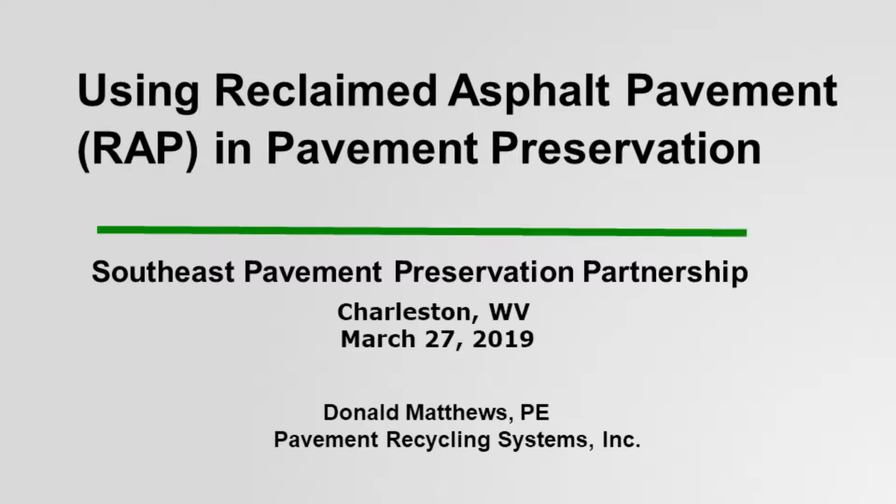So I'm going to talk about using RAP, reclaimed asphalt pavement, in pavement preservation. Let's talk about what we know. One is asphalt is the second most recycled material in the world, only behind water. And it's a valuable aggregate. Some of the best aggregates we have are in the roadways, and it works really well in hot mix, but some areas limit the amount that can be used in hot mix, and sometimes it's not cost effective. If some agencies allow it and others don't, the hot mix producer isn't going to look at it as a consistent method.

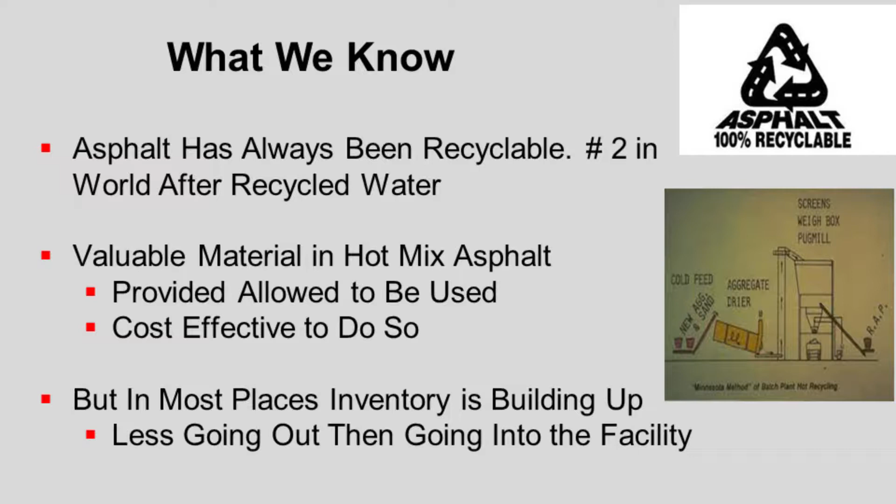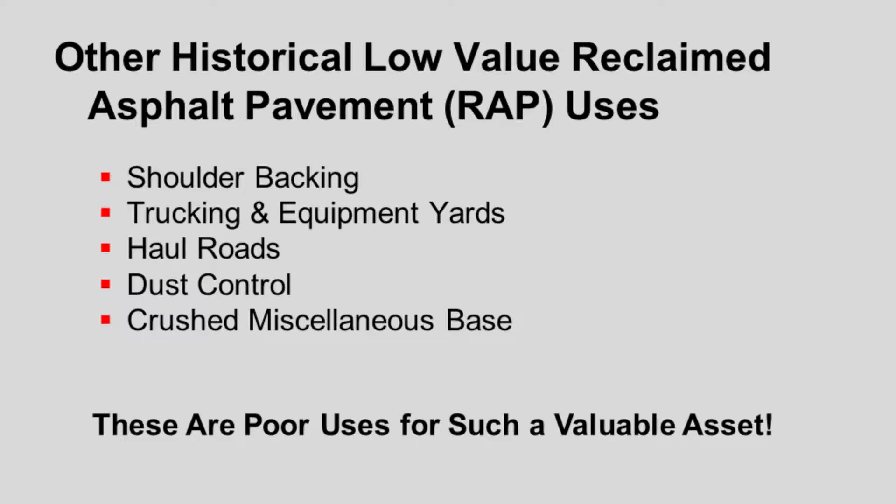Because of that limitation, we keep having buildups in different areas around the country. We're getting mounds and mountains of RAP. Some of the historical uses have been shoulder backing, laying it down in yards, haul roads, dust control, and other miscellaneous uses. But these are really a poor value for such a valuable asset. There's no need to squander it or virgin aggregate, because in many cases RAP outperforms the virgin materials.

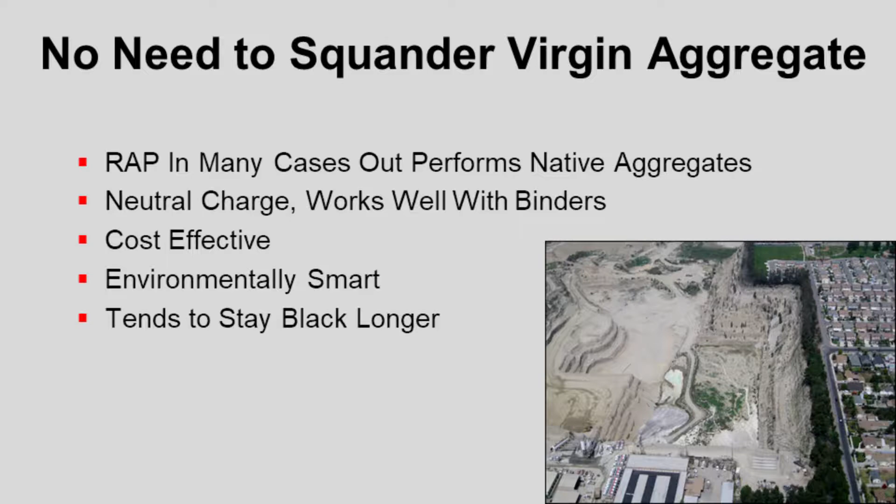It's neutrally charged, so when we use it with emulsions, we don't have a problem whether it'll work. It's really cost effective. It's environmentally smarter. And when we use it in seals, it tends to stay black a little bit longer. I'm not going to say it's a black rock because it does oxidize out, but it tends to stay black longer. So today what I want to talk about is some alternative uses.

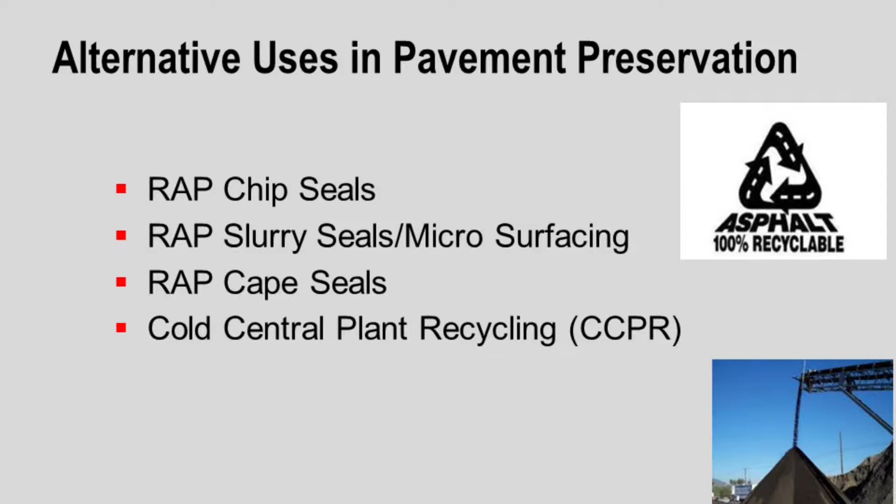One is RAP chip seals, some RAP and slurry microsurfacing, combining the two into cape seals, and then I'm going to touch a little bit more on what Jason started here about cold central plant recycling.

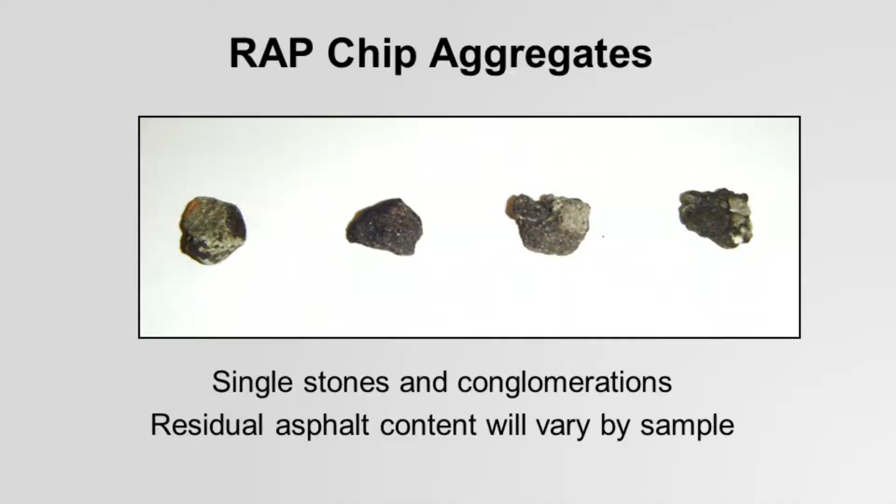So when we're looking at RAP as a chip aggregate, you'll find when you crush it down that you have different components of it. Some is almost the original virgin rock, all the way to the end where it's just a conglomeration of different aggregate sizes. And it'll vary depending on the type of source of the RAP.

So what we do is look at our RAP gradations. These are the two gradations we make out of California, and we use it quite a bit. I will tell you right now that when we have an agency switch over to RAP aggregate, RAP slurry seals, or RAP microsurfacing, they don't want to switch back. They like it better, they like the looks better, they like the performance better. The only time an agency will ever switch back is simply from a cost standpoint if they have a job that's way out, closer to a virgin aggregate source. But if they can get the RAP, they actually specify it and do it.

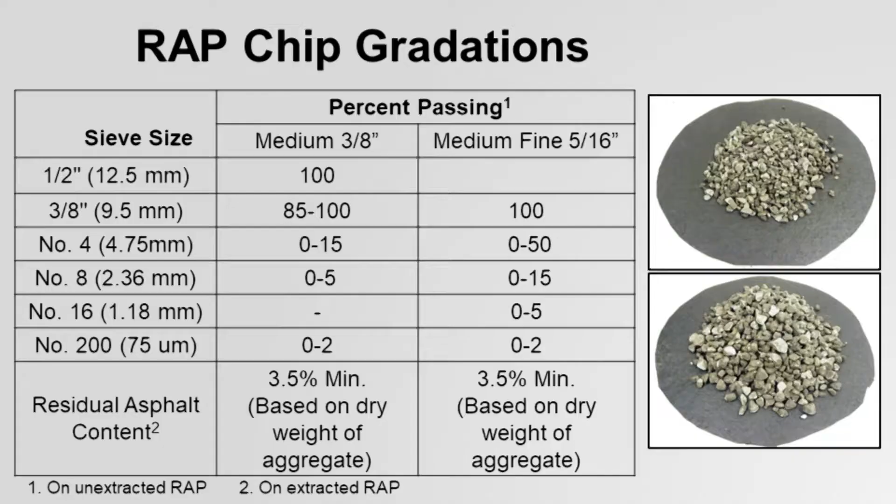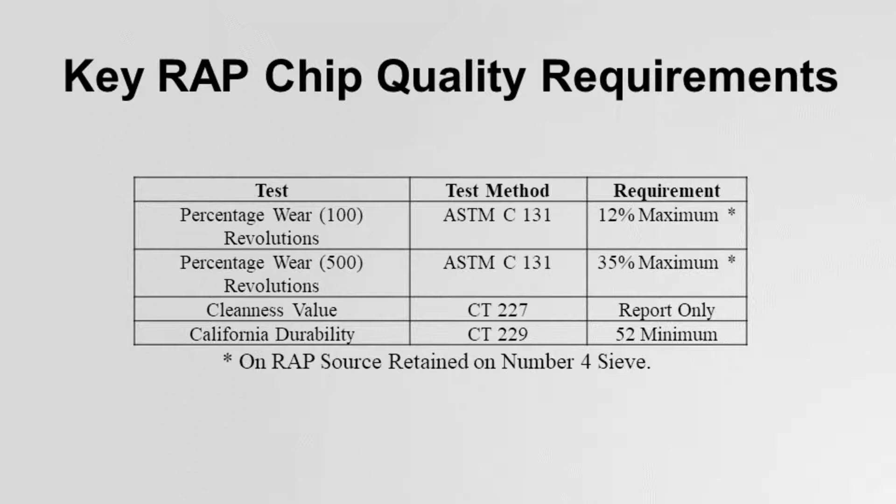We also look at cleanness value, but we only report it. The difference versus RAP is when you are doing virgin aggregate, you want to make sure it's really clean so that the rock can bind to the asphalt. Well, the dust in RAP chip is actually asphalt, so we get extremely good binding to the asphalt.

Sometimes people go, oh wow, this looks dusty, but the dust is actually asphalt. We don't care. What we do want to care about is if we're using an emulsion based product, we'll wet it down so it'll stick to the emulsion a little bit better. If we're using an asphalt rubber though, it's just the opposite. We want to dry it out so it sticks to the asphalt rubber better. But again, the bonding is excellent.

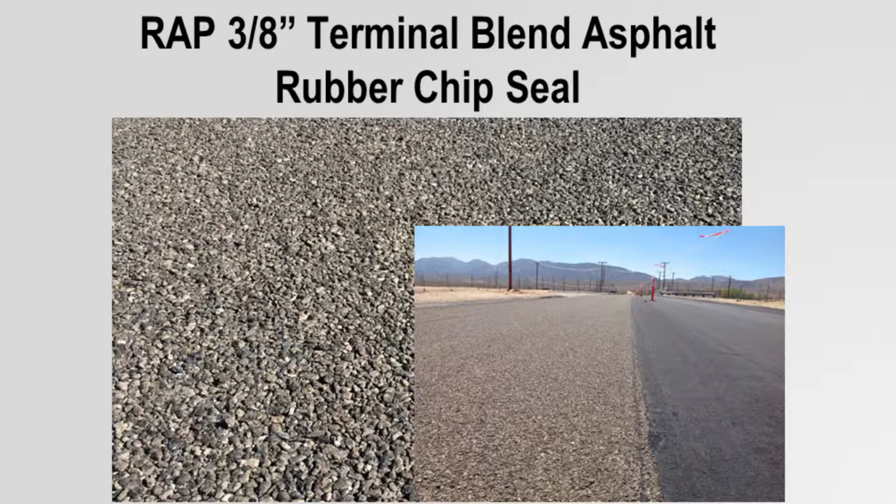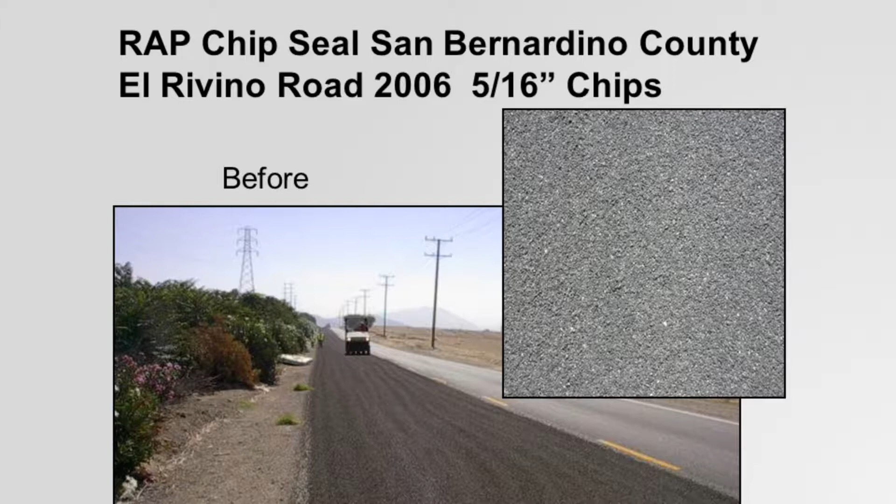So here's just an example. Here was a 3/8 inch chip using an asphalt rubber chip seal. Here we're just applying it with a polymer modified chip seal, 5/16. First job we did, and anybody who flew out way back when, we actually traveled on this road when we had the recycling conference in California back in, I think it was 2009. We had done a chip seal for San Bernardino County. They tried it, it was their first job, and we did it with 5/16 inch chip.

You look at this road today, 12 years later, and it's still handling a lot of traffic. There's a cement plant, and it looks really good. People ask me why we only did one side of the road - well, that was San Bernardino County on the right side. On the left side was Riverside County, so they didn't do that other side.

So we can do it with a scrub seal, which is essentially where we take the emulsion and use brooms to scrub it into the cracks, so it acts as a crack filler and a chip seal at the same time. We use an emulsion with RAP chip.

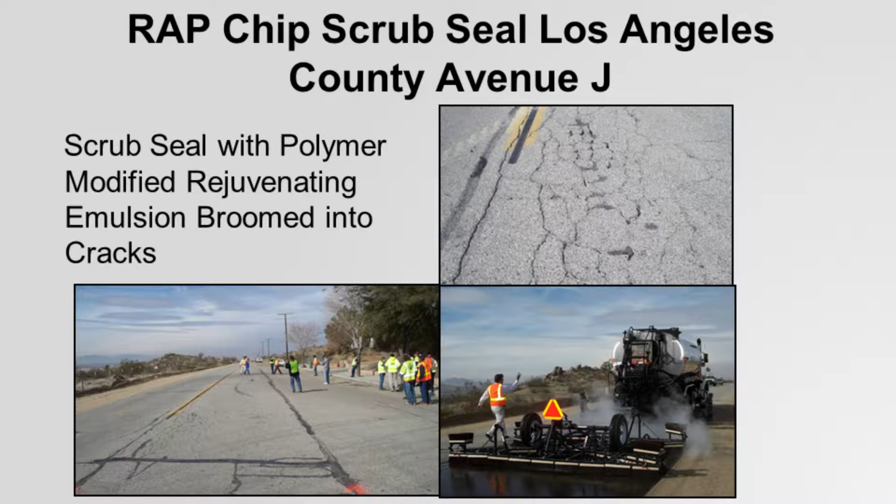County of Los Angeles has gone 100% exclusively to RAP chip and RAP microsurfacing. They do some projects where I wouldn't necessarily recommend a chip seal - there's a lot of fatigue cracking, and they're essentially just trying to buy time with it, so they do a scrub seal. You can come in and actually see some of the cracks, but the chip seal with the RAP stays in the cracks, and 6 years later they're still happy with the performance. It may not look as good, but it's definitely sealing it up and buying them time.

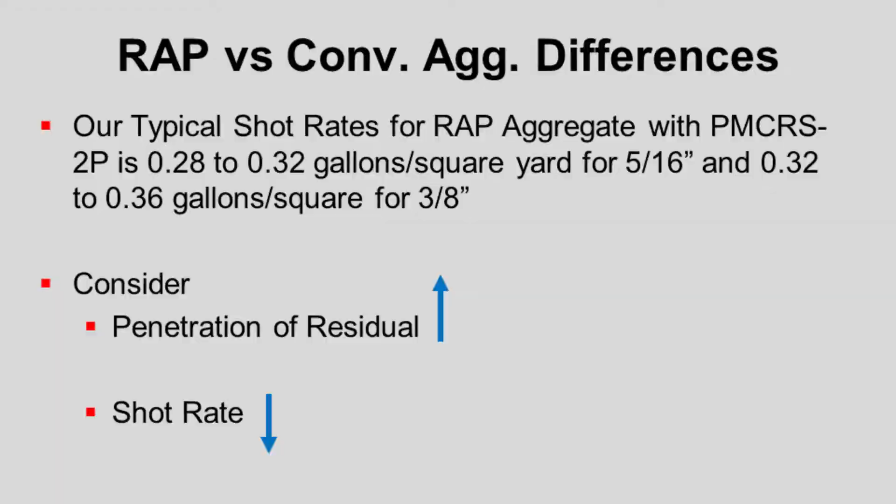What's the difference between RAP and conventional aggregate? Well, our typical shot rates for RAP aggregates are about 0.28 to 0.32 gallons per square yard for a 5/16 mix, and about 0.32 to 0.36 gallons for a 3/8 mix.

We start off with the same shot rate for the RAP - we don't get any benefit from the asphalt. But the one thing we do look at is the penetration on the residual asphalt. If the penetration is high, we reduce our shot rate down because we get a little more diffusion, a little softening of that asphalt, and that RAP blends in a bit more with the emulsion we put down on the roadway.

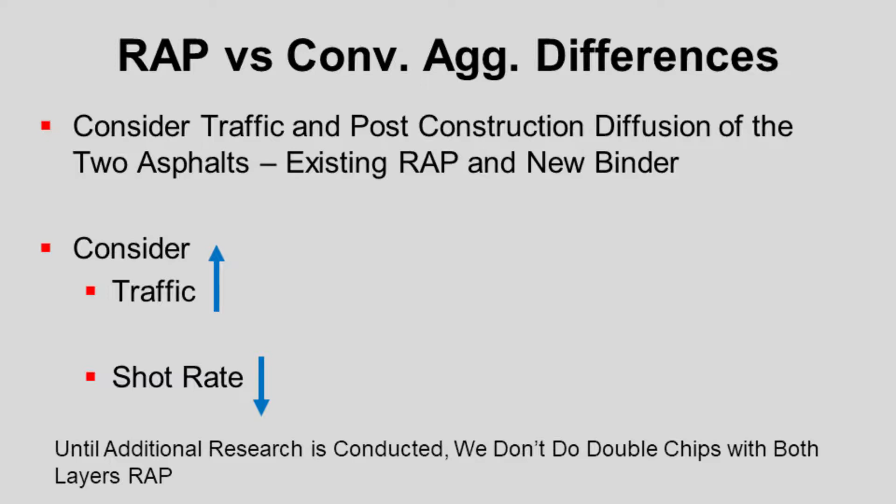On the other hand, we also look at traffic. With high traffic, mostly we're worried about dislodging the aggregate on chip seals. It's just the opposite with RAP - if traffic is high, we actually reduce the shot rate. It needs the asphalt in the emulsion, and it softens it up faster. On one job where we did the same shot rate, we got a bit of bleeding. We reduced the shot rate and the traffic actually kneaded it in, so we could reduce the emulsion, actually saving some money.

Right now, until we do additional research, we're not going to look at doing a double chip with RAP. So if it's a double chip, we typically do one or the other layers, depending on the agency's preference - one with conventional aggregate, one with RAP. We just don't want so much oil and so much asphalt in that existing roadway.

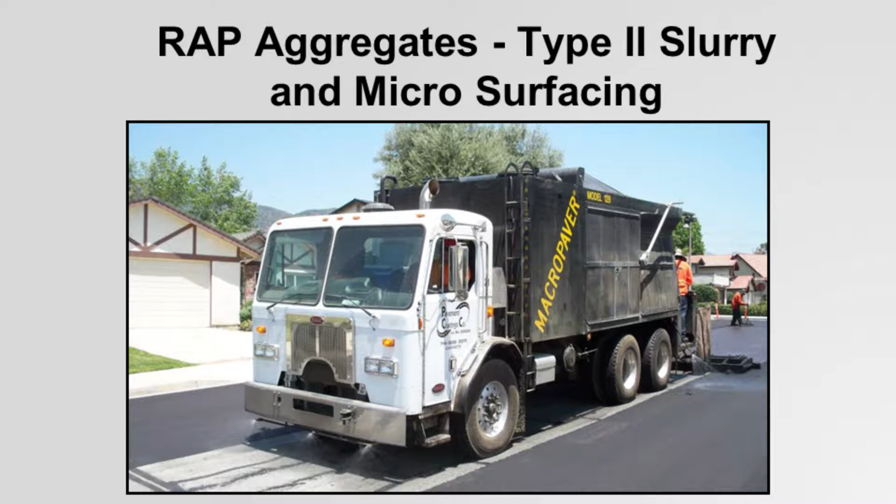We have no problem doing a RAP cape seal with a RAP chip seal and a RAP microsurfacing on top of it. So when it comes to RAP aggregates, type 2 slurries or microsurfacing, we use conventional equipment.

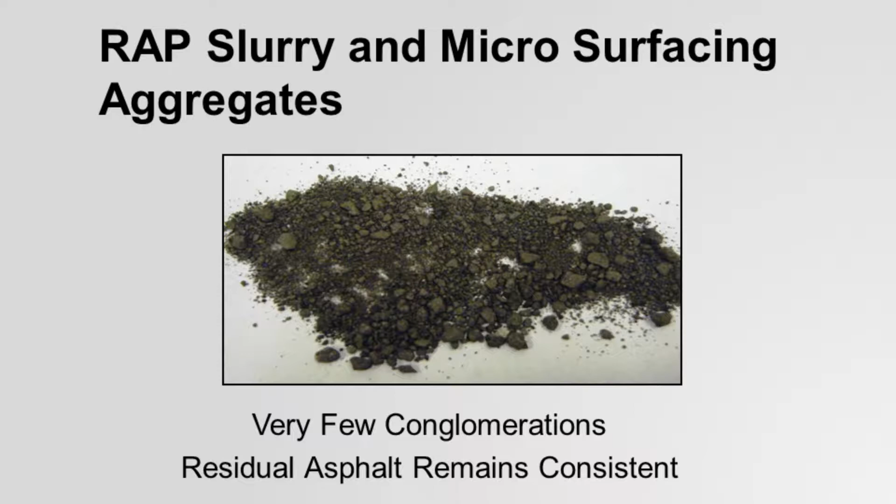And now, because we're getting finer material, we have fewer conglomerations - it's closer to the parent aggregate. There is some, I won't say there isn't, and I'm going to show you some gradations on that. This is a typical type 2 RAP aggregate pile that we just placed on the job.

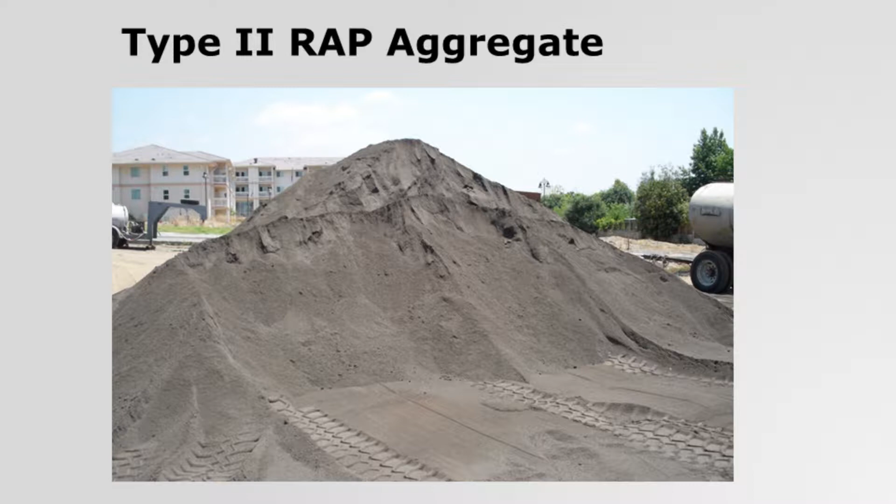So the differences for RAP aggregate in slurry or microsurfacing - we don't get as many fines. The fines are locked up in the asphalt, so it's a bit coarser on the RAP gradation than on a typical slurry. We don't need those fines to help with the bonding; it's already within the aggregate itself.

We do have an issue with clumping. So when we make the material, we don't stockpile it as long because the RAP will start sticking together. If we make a whole batch of RAP slurry, like I have right now, I'll just run it over a screen right before we send it out. It breaks down pretty easily, but we want to make sure it doesn't clump out in the field.

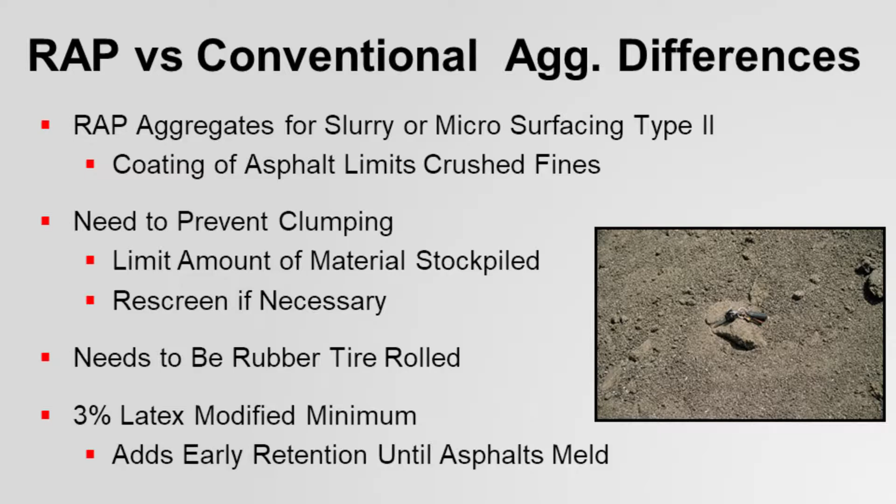We do use a rubber tire roller on every slurry - it helps start kneading the RAP and the emulsion together. We also add 3% latex modified - we modify the emulsion with 3% latex. The polymer actually helps bind everything together until everything starts melting together.

If you look at our typical type 2 gradation, you're going to see that the unextracted RAP, we're down to about 2 to 12% passing the number 200, which is a little off from the ISSA type 2 slurry specification. But when we extract it, we're really close to being into the ISSA slurry requirements.

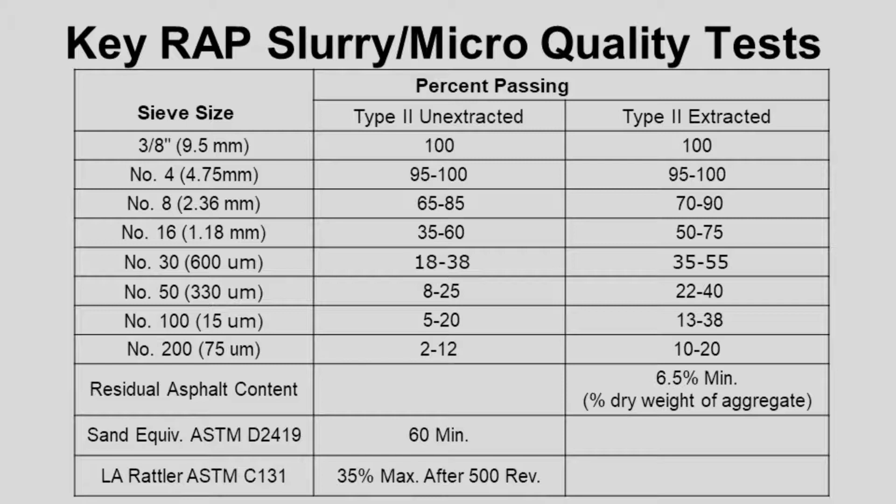We do require that at least 6.5% residual asphalt is in the RAP. We do that to make sure that it is pure RAP, that we have a lot of the binder in there. We don't want some dirty material in there. We require a sand equivalent, and we do an LA Rattler on all of our RAP to make sure we have a good durable material.

The one thing I want you to note here is we said we use a rubber tire and we add 3% latex, and everybody goes, oh well, that'll increase the cost. Well, no, because of the RAP, when you're looking at that in slurry, you don't need part of your emulsion to just go to coating the material. It's already coated, so it goes to more bonding. And because of that, you can see with RAP, our emulsion contents are typically 10 to 14%.

Compared to our conventional aggregate that's 12 to 18%. So we actually use less emulsion, and therefore the cost with RAP is actually slightly lower than it is with conventional aggregate. And you get the rubber tire roller, and you get the additional latex.

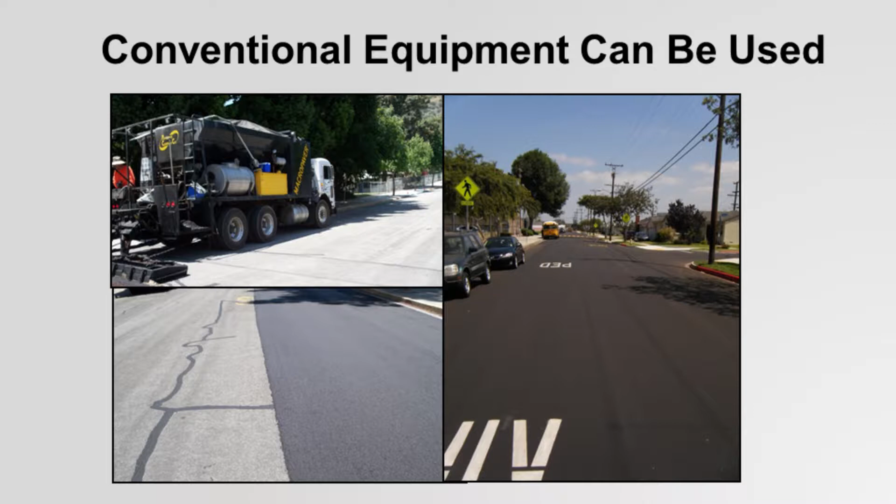We do look at a residual AC that we want a high residual asphalt content. Any conventional equipment can be used. It's not like you need special equipment. We do modify essentially the vibrator plates, we move them up a little bit to give a little more room. But we use our typical slurry or microsurfacing equipment.

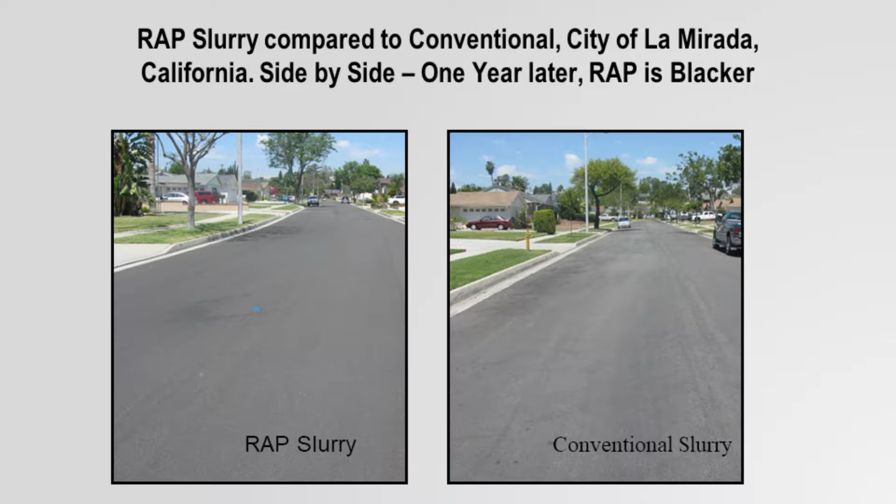And this is what kind of the agencies like, is when you compare a year later or 5 years later and you go down and you look at the streets that were done with conventional aggregate versus RAP aggregate, you just go, you know what, the RAP just kind of looks better. It's not like it's a whole lot darker, but it's a little bit darker. The cracks seem to be filled in a little bit better, and that's why they like it. Plus, it's just environmentally so much more sustainable.

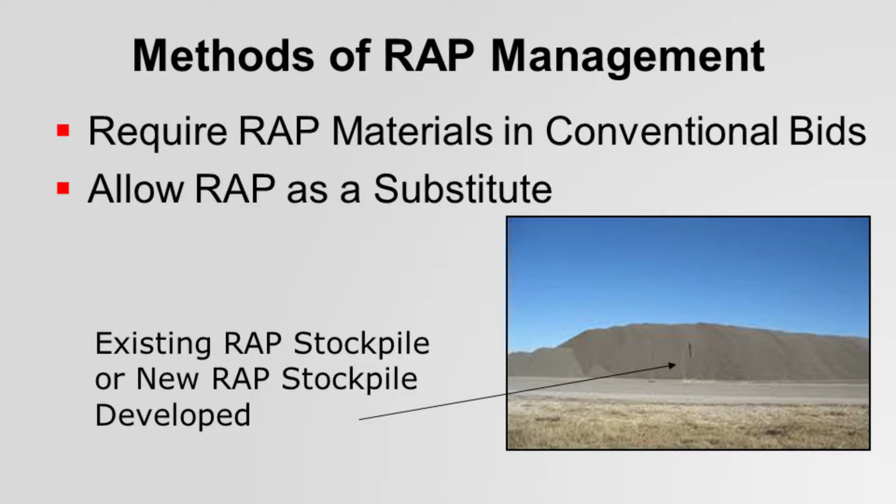So how do you use RAP? Well, one is you can just require it. We have some agencies that say you can't use conventional aggregate, you must use RAP aggregate, period. They specify it. Others just say you can use it as a substitute. You can either use the RAP gradations, or you can use it as the conventional.

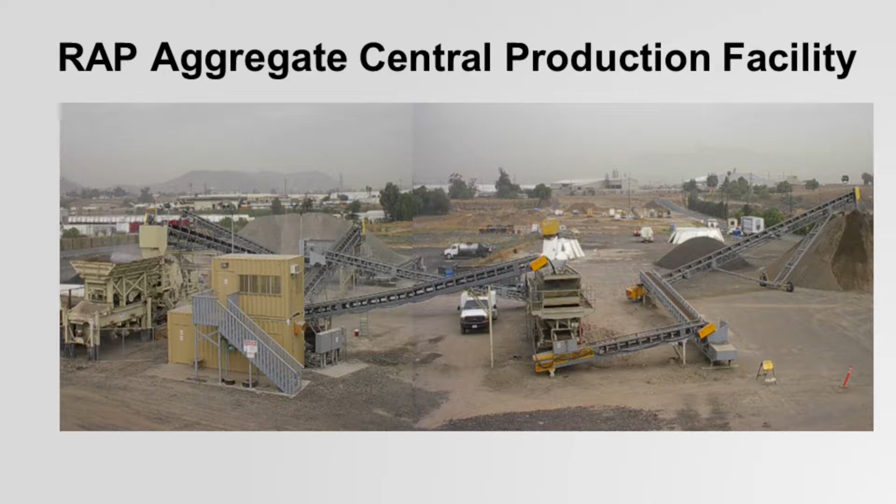It's up to you. We do it several different ways. We have a RAP aggregate central production facility where we go ahead and bring in RAP from all our milling jobs, process it out, make it to sell just to competitors, to whoever wants to buy it. You can see that we just store our 5/16 inch chip made from the RAPs. Every day you could come in and get some of those.

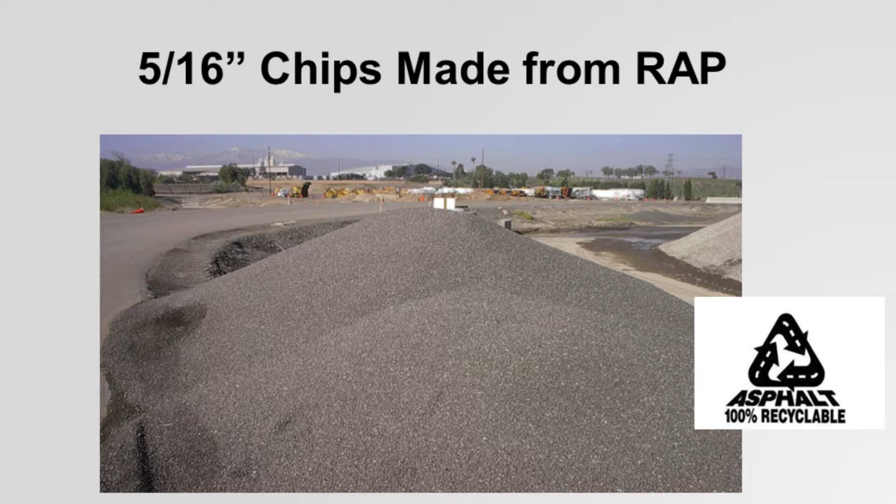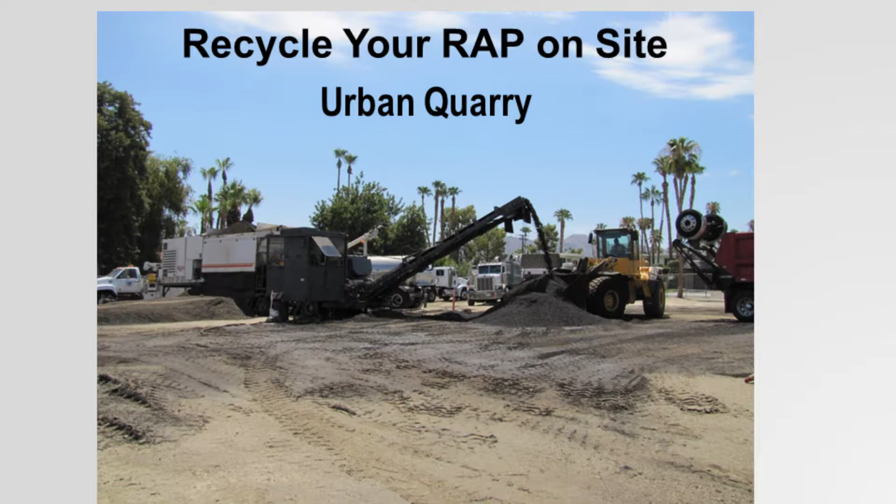Or what we also like to do is we do what we call our urban quarries. And essentially we find RAP piles and we go to them, or we have sites that we bring the material in and we process it and make it on site.

California DOT, Caltrans on one job said, hey, we got a bunch of RAP, we want you to come out and we want to crush it down and use it. And so we ended up making both the chip and slurry simultaneously, came out with a plant, made both of it, and they did a Cape Seal over Interstate 10, which is a huge traffic volume.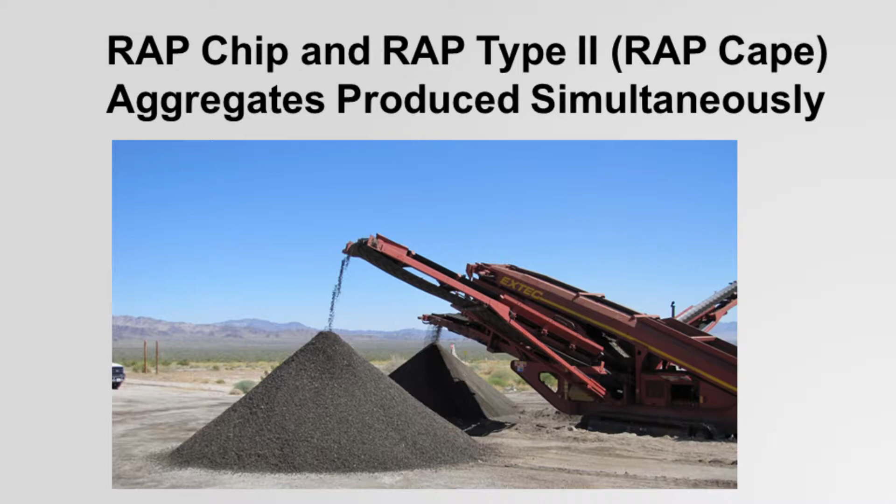I'm going to show you an example of LA County. It's a short video that they did, so how they did it for essentially a Cape Seal where they used RAP chip and RAP slurry.

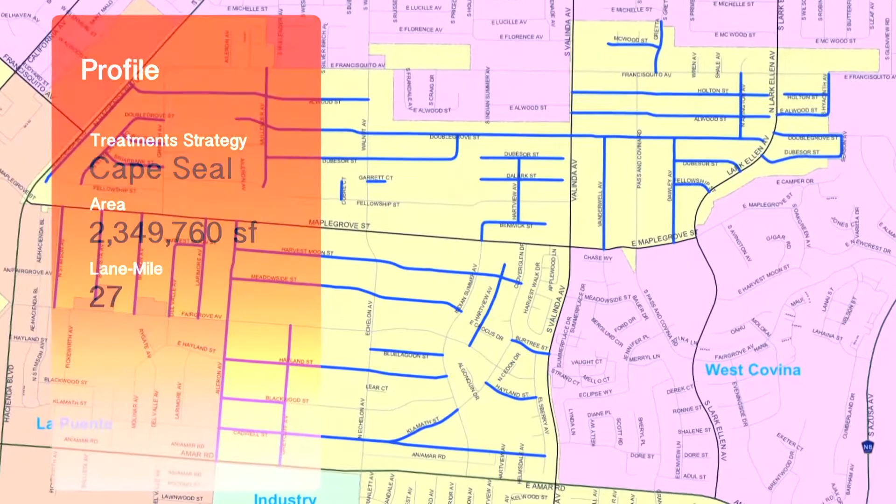Yeah, so they had one project here. And you can see the kind of urban sprawl we have. It was about a 2 million square foot job, and they wanted to do a Cape Seal with the RAP chip and RAP slurry, and they had some areas that were really bad. So what they did is said, hey listen, we're not going to go over there.

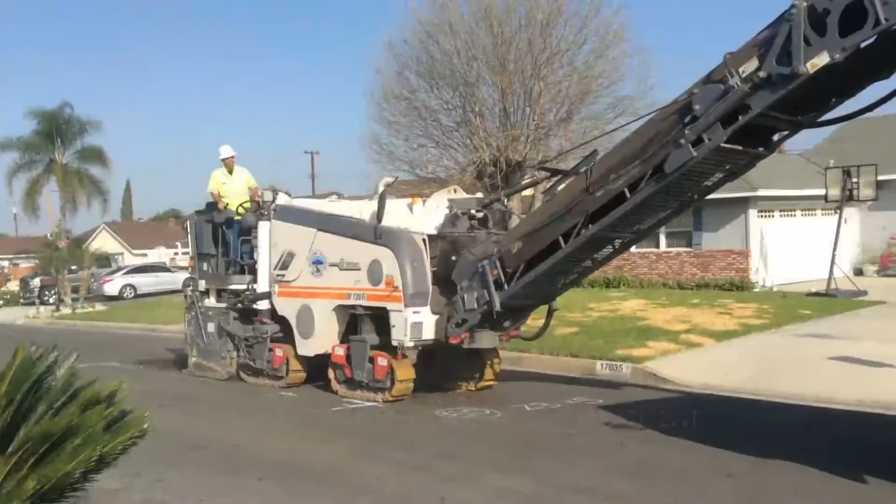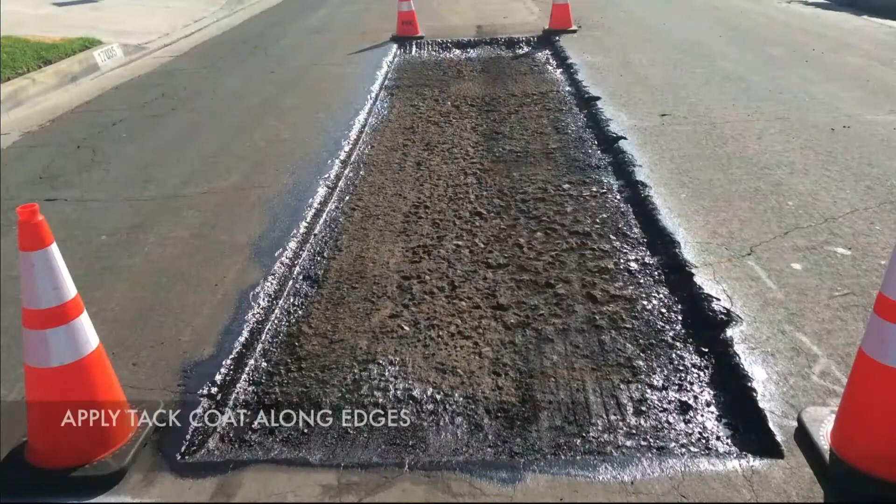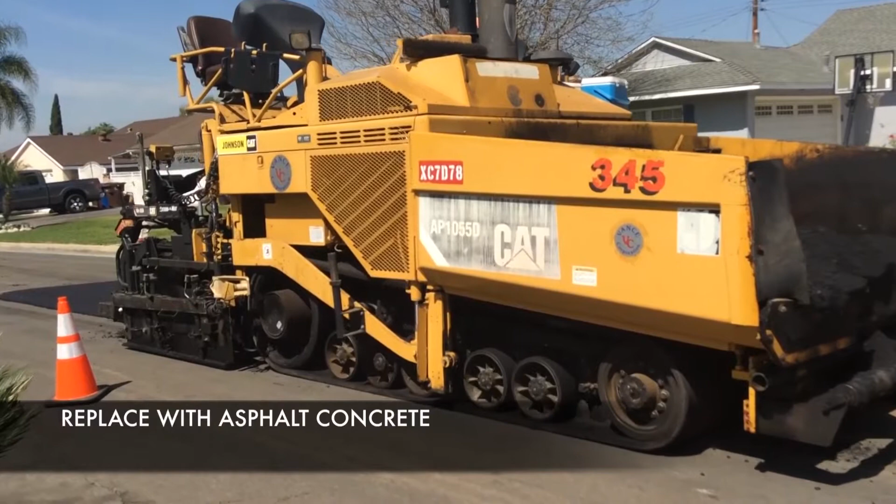We did just a few dig outs first. We milled it out. And then just replaced it with asphalt concrete. So just the real bad subgrade areas, we did isolated dig outs. There were probably about 15 of them throughout the whole project.

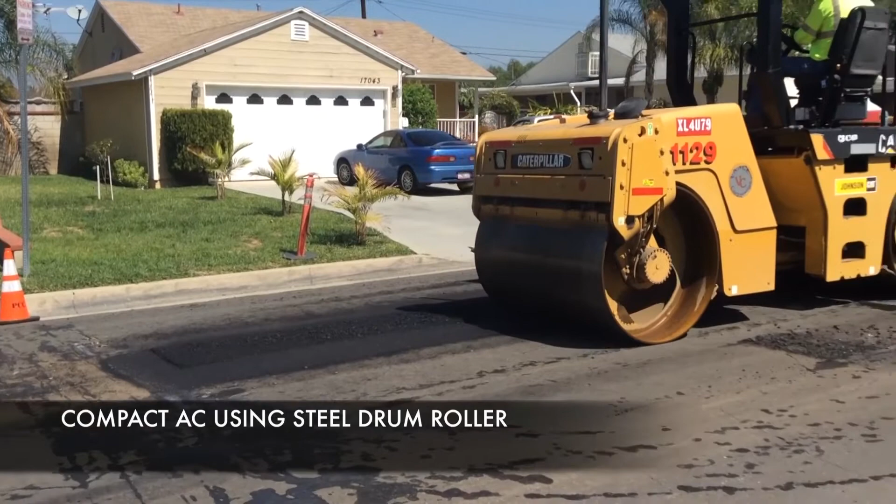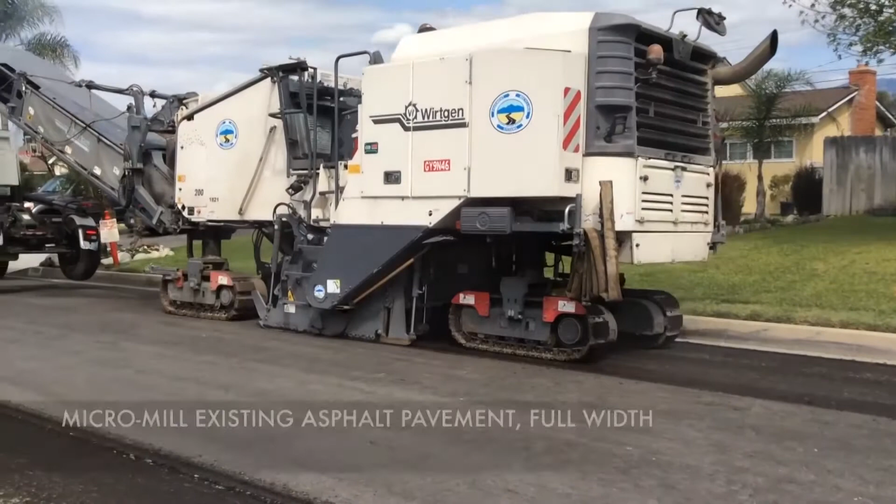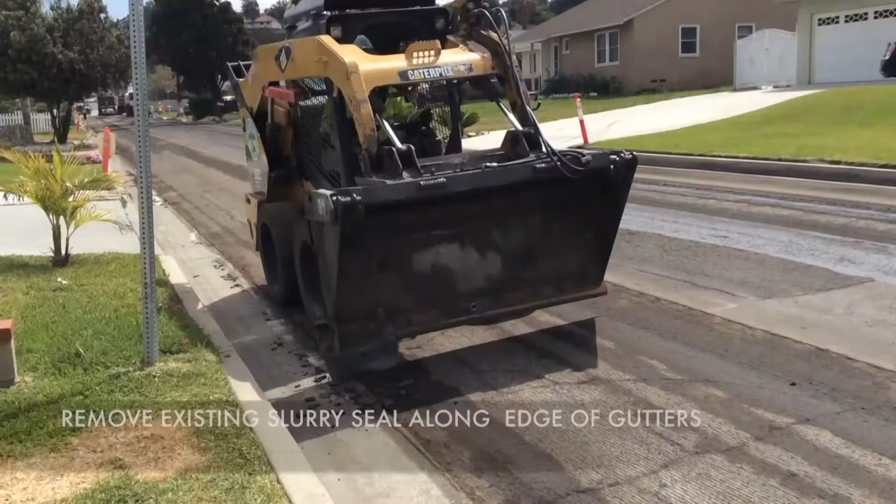LA County has gotten to the point where before they do any slurry or chip, they micromill the road. They just absolutely love it. They think they get better bonding, they can re-get the surface back to where they want, and they remove any other layers. They think it's just a cheap investment to go ahead and micromill the roadway prior to doing their chip.

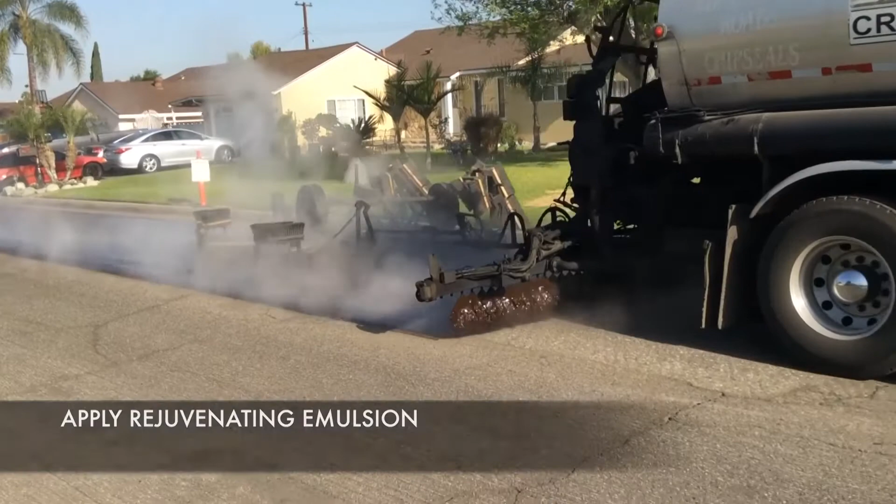So you can see where they micromilled over the patch and some of the cracked areas. And then we do a scrub seal, where we're scrubbing the emulsion in so it acts as a crack filler at the same time. You can see the RAP chip - it looks a lot darker when we're placing the RAP chips.

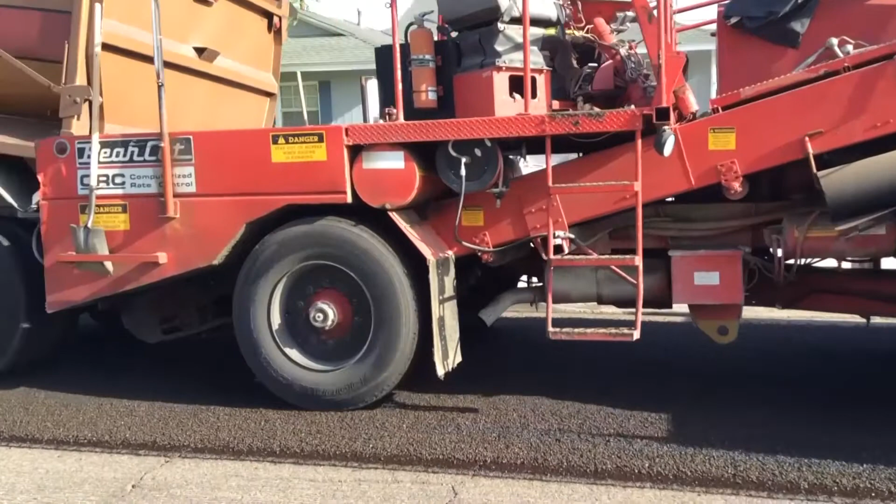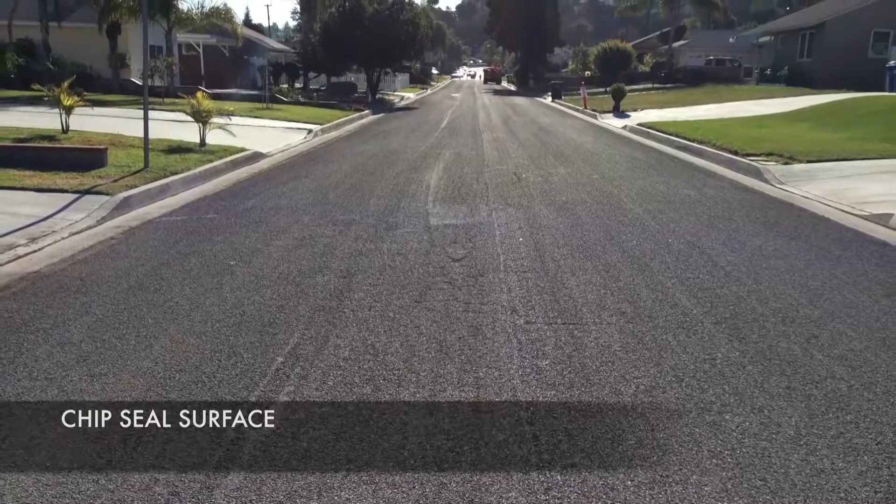Now, we'd never do a chip seal in an urban environment like this, so they'll come back through after that and do a RAP slurry seal on top of it. And that's your kind of finished surface.

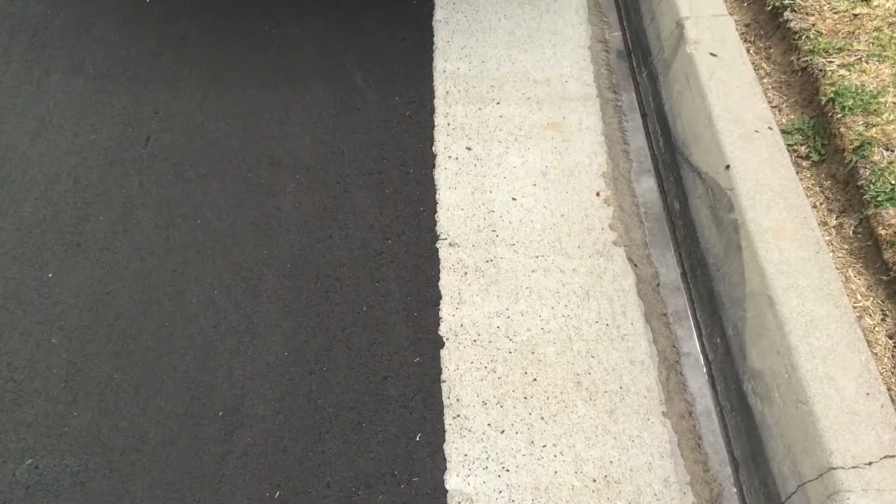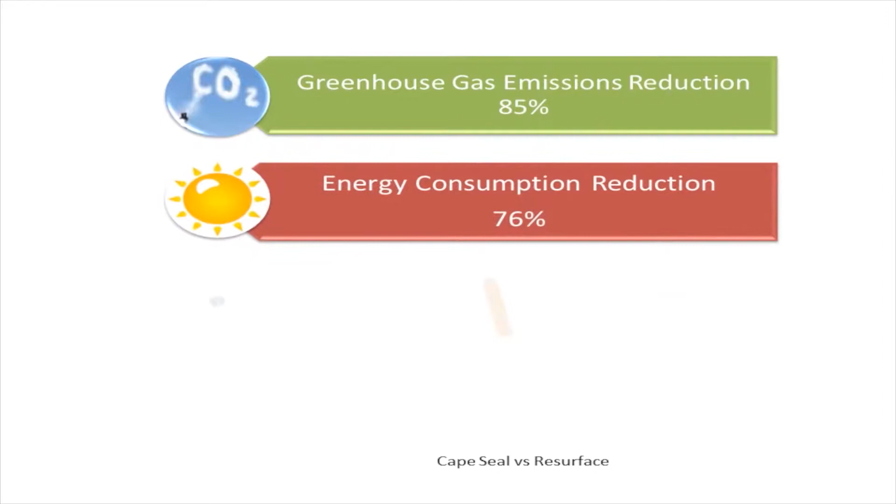And this is what they really started looking at - they calculated how much greenhouse gas emissions they save, their energy consumption, compared to just a normal resurface. And they figured out they had a huge cost savings on it. And this is about 3 years later, just driving the roadways.

So we do a lot of RAP chips, a lot of RAP slurry seals. I know it's starting to get more prevalent throughout the country. I get a lot of phone calls, people asking how to do it. I got one agency from South Dakota who said hey, they were going to do it. They called me back and said it worked real well. As I said, anytime we have an agency use RAP chip or RAP slurry, they don't ever want to go back. They just like the performance better.

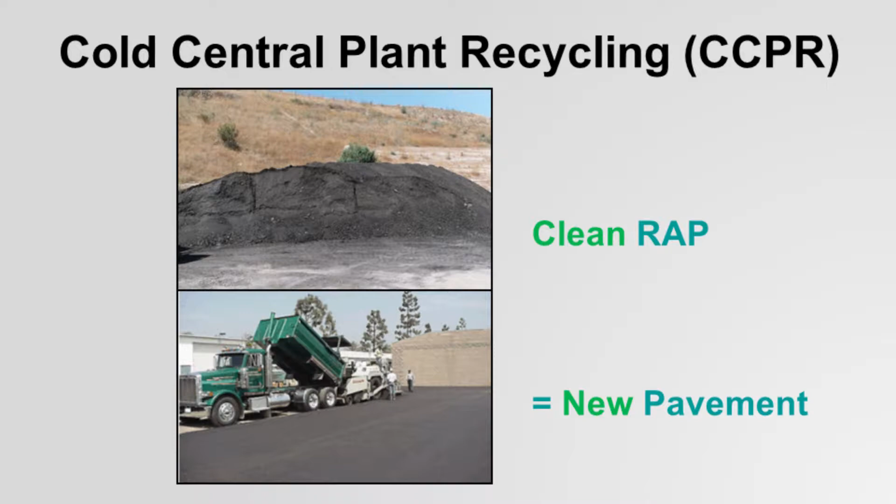So Jason touched on this a little bit. I'm just going to go through another way of getting rid of those mountains of RAP in a pavement preservation option - essentially cold central plant recycling. You got clean RAP, you got new pavements. And you can do it kind of 3 ways.

You can do on-site cold central plant - what Jason talked about is you mill it and just take it somewhere close and do it on-site. Or you can bring RAP from another job - and that's one of the things I want people to start thinking about, if you got a whole bunch of milling from one job and you can use it someplace else, take it to the other job. Use that RAP again. And the other is where you can just have a central location where you store your RAP. So on-site, prior to milling, we cold mill it and stockpile it nearby.

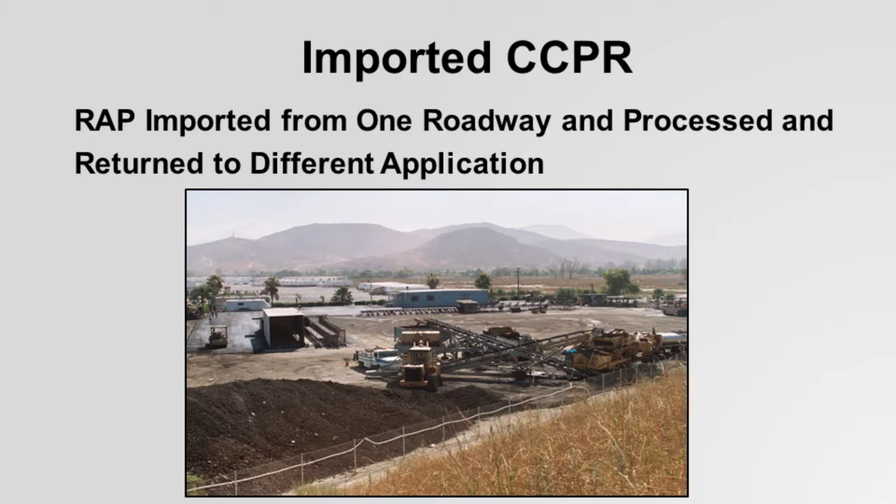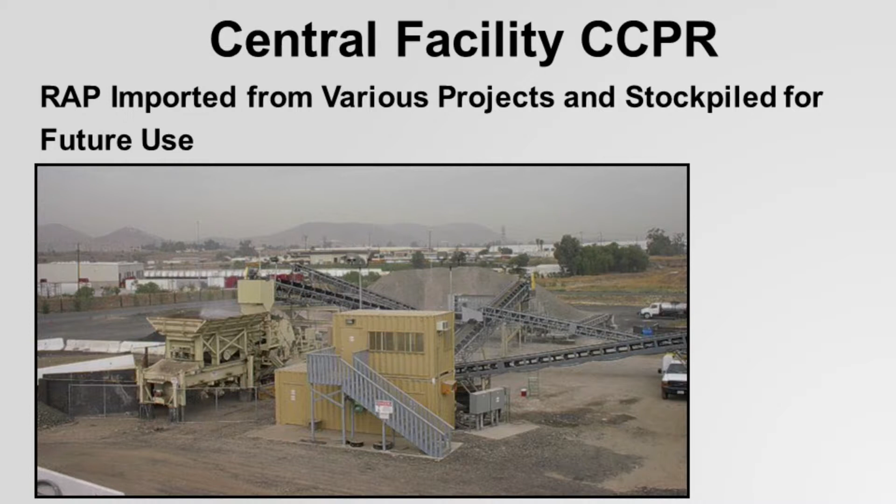The nice thing about central plant recycling is you can fix the subgrade, soil cement it, or just deepen it, whatever you want to do. You can import it from one job - here's where we had one city job taken from one, and we used it to pave a kind of industrial facility. And then at the same facility where we do a RAP chip slurry, we just take in all our RAP, we segregate it, and we start using it for whatever project we need.

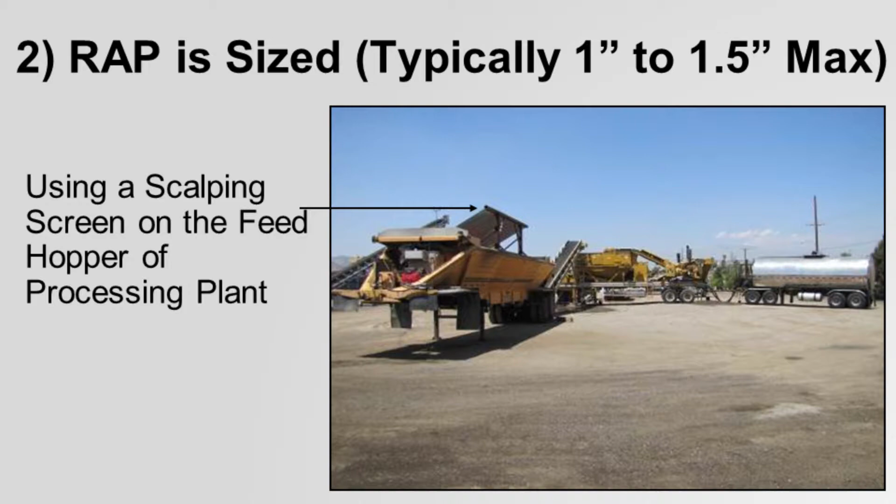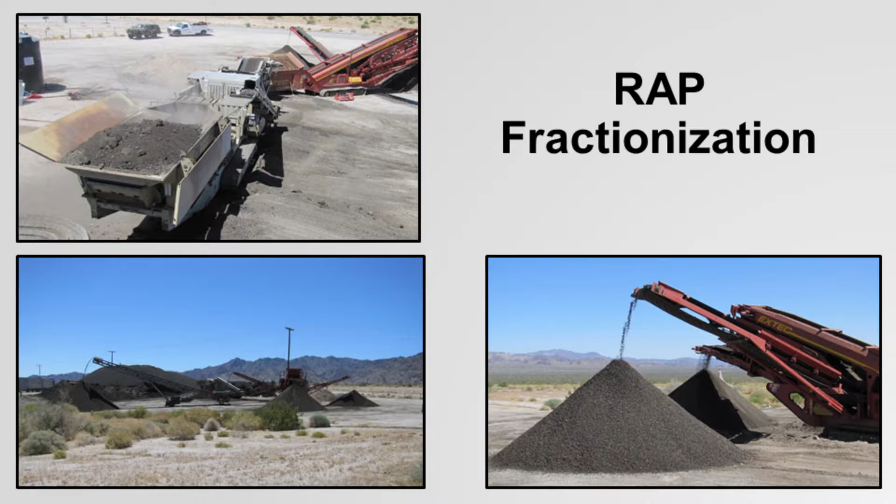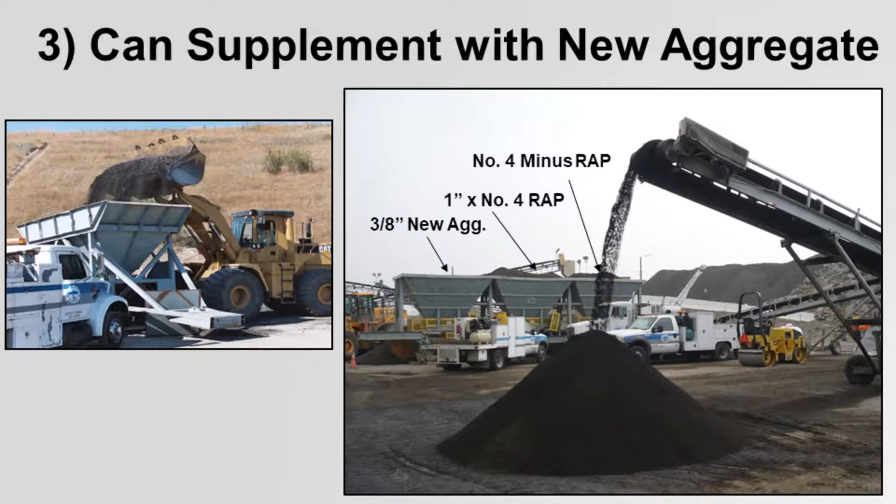We typically size the RAP anywhere from 1 inch to an inch and a half. You can just use a scalping screen on it, or you can crush it and screen it all at the same time. Or what we like to do on our central facility is fractionate it, make it into a couple different layers so we can blend it back to a specific mix design. That way we can also add, if we want to - but it's very rare - different materials together, and we can even add some virgin aggregate if we want to make it a very, very dense graded mix design.

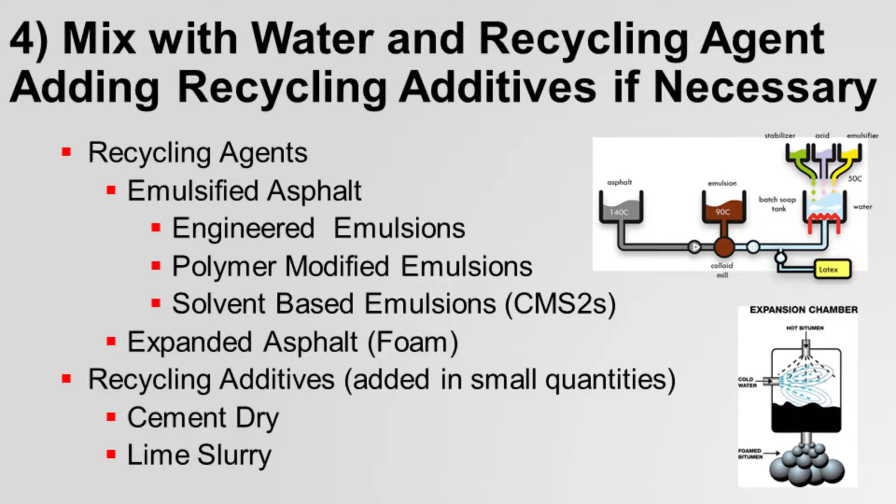So we're going to mix it with a recycling agent. We either use emulsions, engineered emulsions, polymer modified emulsions, solvent-based emulsions - we use different kinds depending on where we're at. Or we can do an expanded foam. Both of them work very well. Sometimes we add a little cement or a little lime - that just adds in the initial behavior improvement of the material.

We can also just do everything on site with a combination processing plant. This is the train we use for cold in place recycling. We normally drag this down, but we can also put it stationary where it has a crusher, screen deck, mass flow meter, and Pugmill all in one.

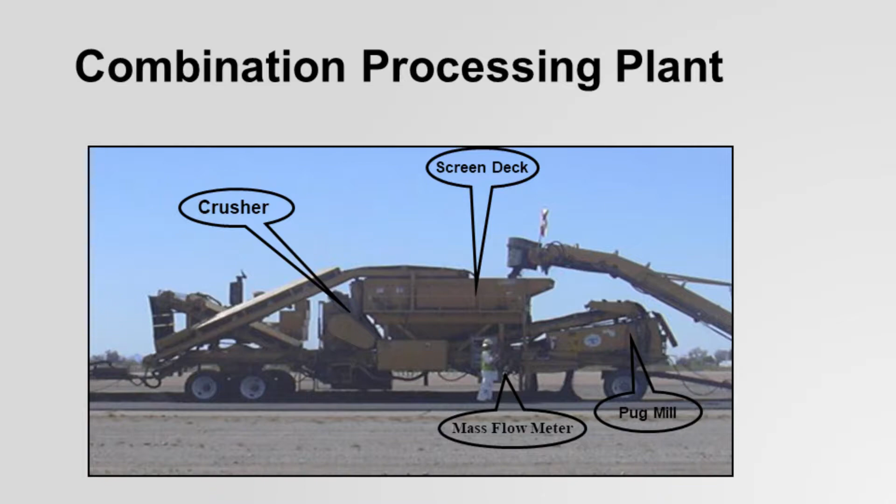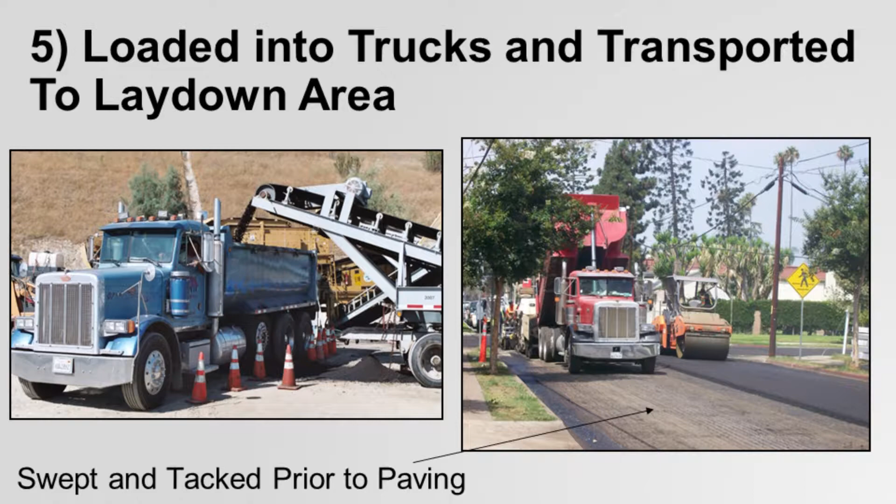Or we can just size the RAP and bring another Pugmill, like Jason showed, and do it anywhere on site. So after we mix it, we truck it. That's where it's not as environmentally sustainable as cold in place recycling.

It's in the same place, but it's a whole lot more sustainable than trucking it further to an asphalt plant and bringing back hot mix. We do sweep and tack before any cold central plant recycling to get better bonding, and then we just pave it.

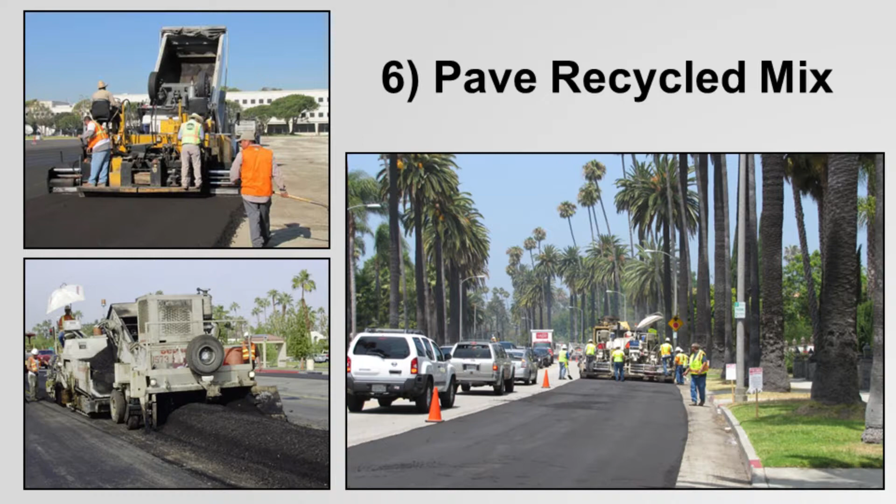You can pave it wherever you look. If you look at the picture in the lower right-hand corner, that's actually Wilshire Boulevard in Beverly Hills. We did a combination cold central plant and cold in place recycling on that. You can imagine Beverly Hills being a very liberal area—they loved it, they loved the recycling part of it.

In fact, we parked our train in about a $12 million mansion's driveway. He liked it so bad.

I'll give you one other thing—it's not so much in this picture where we're doing cold central plant, but you can see the cars. At one point when we were cold in place recycling, somebody measured the vehicles coming by in a short period, and we estimated over $10 million worth of cars driving by in 20 minutes—Lamborghini, Ferrari, Bentley, Rolls-Royce. So if you can do it there, you can do it anywhere.

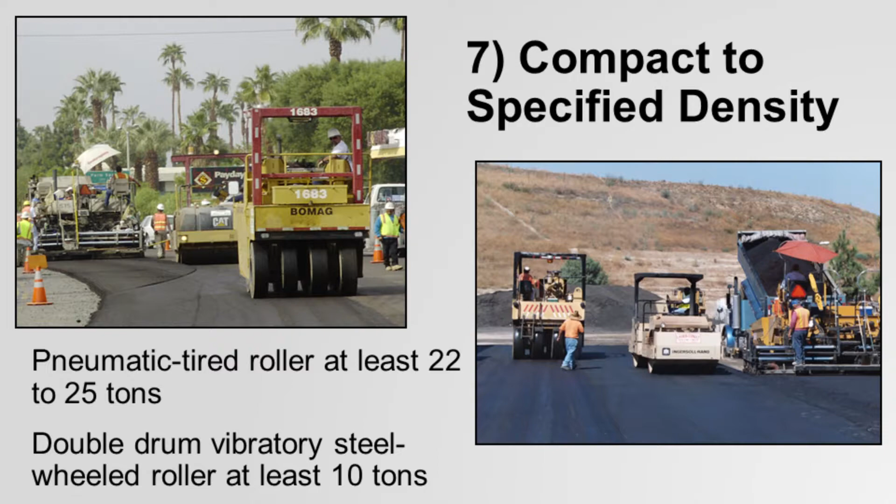Just compact it—make sure you use real heavy rollers because you do get a slightly higher air void. We apply a fog seal and sand blotter and release it to traffic at the end of each day. That's not the problem, but we want to give a little more protection with the sand blotter simply so the fog seal doesn't track or get picked up.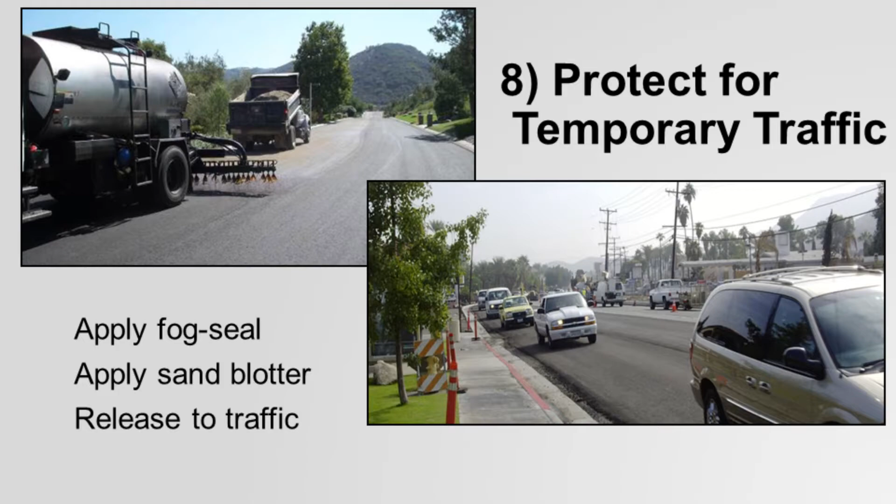But you can see the traffic on there on a recycle we just finished that day. If we use emulsion, we let it cure for a couple days, then re-roll it. If it's a foam, we re-roll it right away, but we still let it cure a couple days.

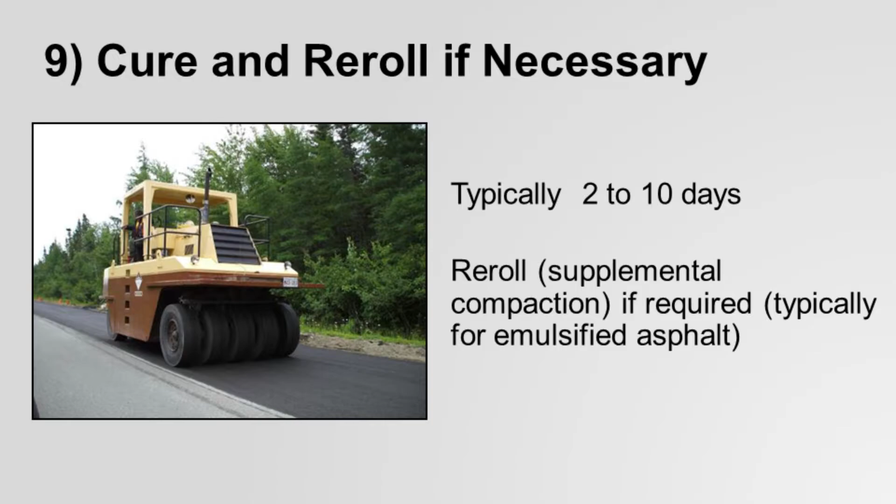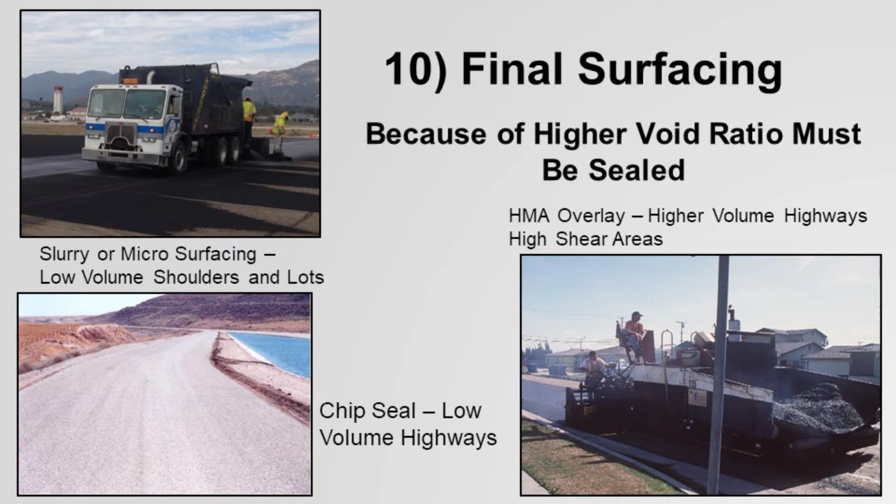And then we have to put some kind of surface on it. Depending on the traffic, we'll put either a chip seal, or most of the time a thin overlay, as thin as we can pave it, just to prevent that shear force with the higher air voids.

Here's an example on an agency where we stripped off the AC, then did FDR. LA County likes to do that a lot—they can improve their structure. We put that down as 3 inches, then put a thin lift of AC on top.

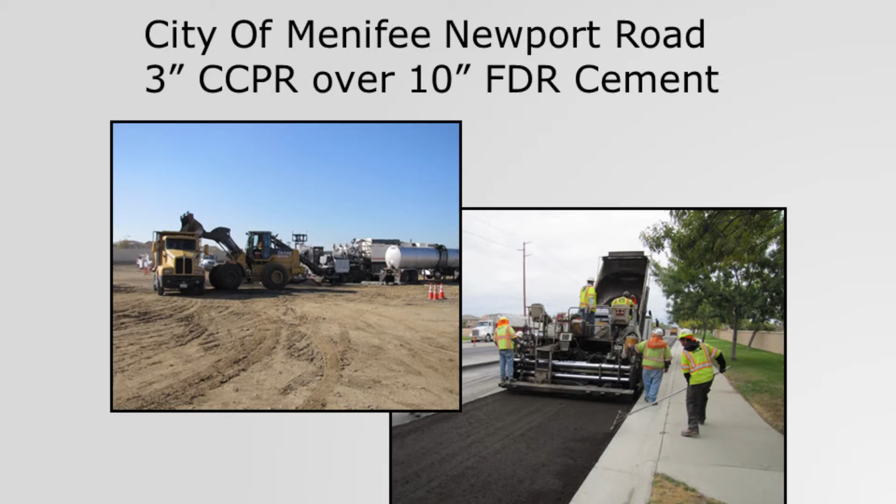And here we did a huge auto auction. We just did cold central plant recycling, and then put just a fog seal on top of it for that. These are actual pictures that we're dealing with.

The solution is use RAP. There's no reason we cannot use it for a variety of applications. I'll take any questions—love them to death.

The hot mix industry owns the RAP, and as long as they own the RAP, more creative recycling doesn't get done. That's just the facts of life.

So change ownership. We have specifications that do both—some say it's up to the contractor to dispose of it, actually saying the contractor mills and removes the RAP, so they essentially own it and can do whatever they want.

We have other agencies that say no. Quite a few agencies started doing this because they had the same challenge—they said the RAP shall be trucked and deposited to this facility, or stockpiled at specified actual locations. I don't know how it works in the Northeast, but specifications are contracts, and if you specify where the RAP goes... we had the same issue where people said 'that's our RAP,' and the agency said, no, part of the contract is you will take it to this location.